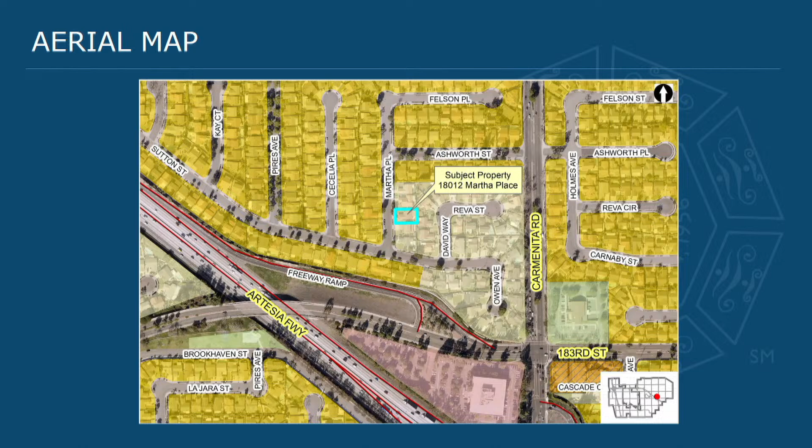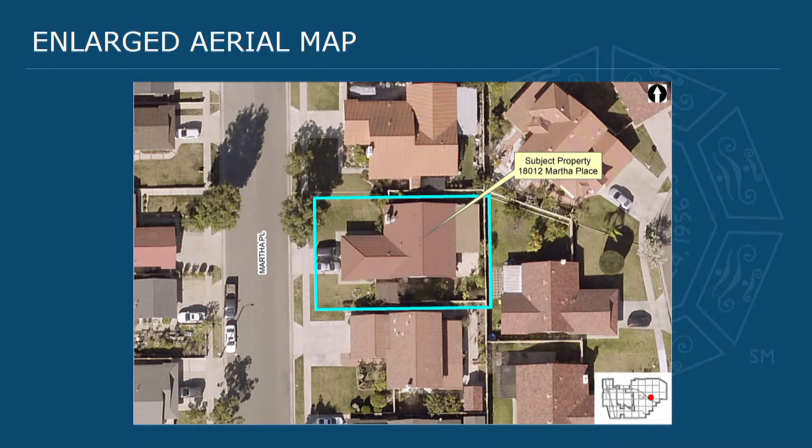The property owner at 18012 Martha Place is proposing a 433 square foot first floor addition and to add a new 1,293 square foot second floor addition to an existing single family home. For details of this project, I'd like to direct your attention to the screen. This is an aerial photo of the subject property, which is located north of 183rd Street and west of Carmenita Road. Sorry about that. Can you hear me now? This is an enlarged aerial view that shows the details of the property. The property is bordered on the north, south, and east by single-family homes, and on the west by Martha Place, across from which are also single-family homes.

This is a view of the front of the existing one-story house looking east from Martha Place. This is a view looking north at an existing unpermitted patio in the rear yard. In order to comply with the Cerritos Municipal Code, project-specific condition of approval 42 has been added to require the unpermitted patio to be removed as part of the proposed project. This is a view of the side yard looking west at an unpermitted storage shed and overgrown vegetation along the southern property line. Project-specific condition of approval 43 has been added to require the removal of the unpermitted shed along the southern property line, and project-specific condition of approval 44 has been added to require all overgrown vegetation and plant material along all property lines be trimmed back and wholly contained on the subject property.

This is the adjacent neighbor plan, which shows the location of second-story windows of the subject property and their relationship to existing windows on adjacent properties. As shown on the plans, the homes to the north and east of the subject property are single-story residences. The home to the south of the subject property is a two-story residence. However, no second-story windows of the addition align with the second-floor windows of the home to the south. Therefore, there are no privacy concerns related to the issues arising from window placement on the subject property.

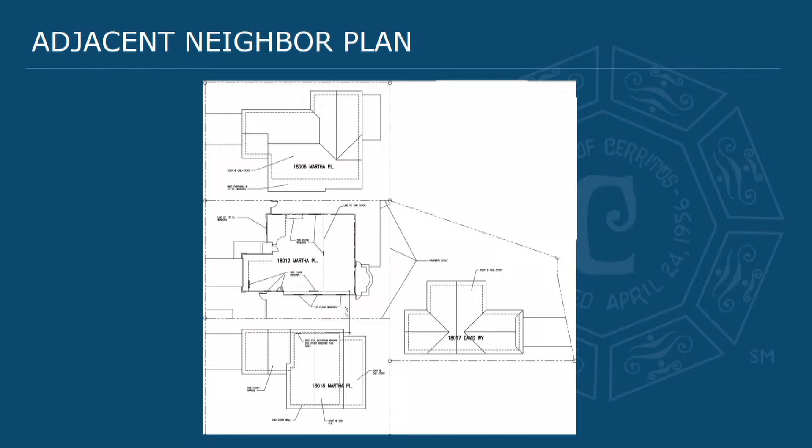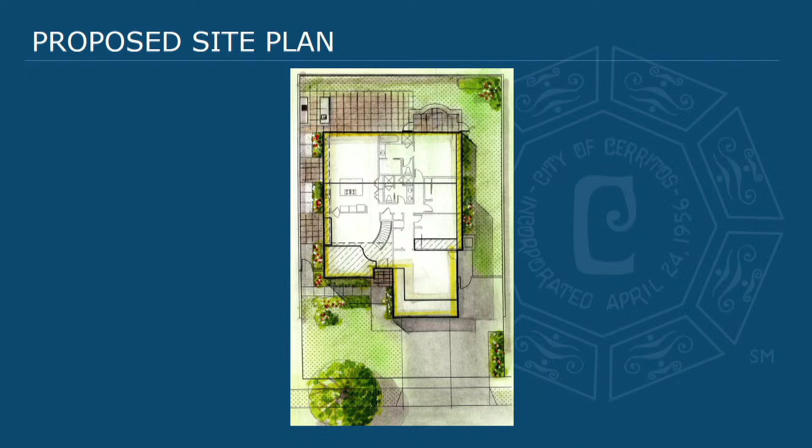This is the proposed site plan. As mentioned, the applicants are proposing a 433 square foot first floor addition and to add a new 1,293 square foot second floor to the existing single-family residence. As proposed, the project meets all setbacks and lot coverage requirements.

This is the proposed first floor plan. Upon completion, the first floor will include a living room, a dining room, a kitchen, a master bedroom with master bathroom, 2 additional bedrooms, a family room, a bathroom, a half bathroom, and a laundry room. This is the proposed second floor plan. The second floor will include a junior suite bedroom with a bathroom and a walk-in closet, 2 additional bedrooms, 1 more bathroom, a laundry room, and a loft.

This is the front elevation. The residence will be finished with a white colored stucco and dark brown trim. 6-inch wide brown colored Hardie board siding will be featured on portions of the front and side elevations. In addition, the front elevation will include decorative stone veneer, which will wrap around the side elevations along the areas that are publicly visible. The front elevation also features a balcony that overlooks the subject property's front yard and Martha Place.

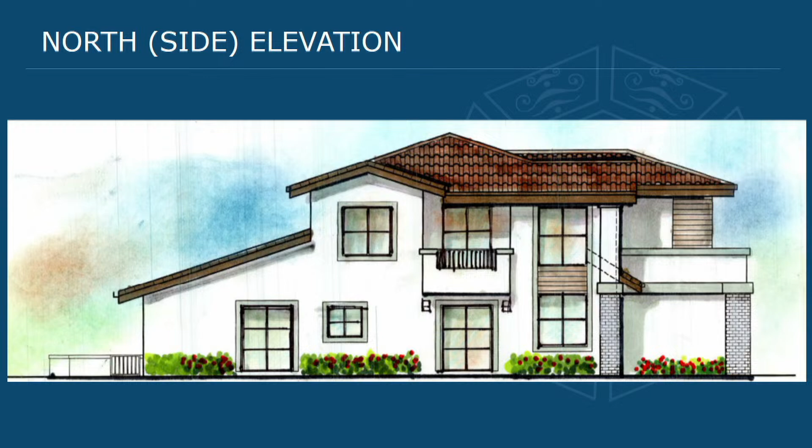This is the rear elevation. The roof of the residence will be covered with a chestnut-colored stone-coated metal, which is consistent with the existing roof material. This is the north side elevation. Here you can see the proposed balcony located on the north elevation. The proposed balcony is solid on the sides and the majority of the front. The balcony also faces the roof of the adjacent single-story home to the north. Due to its location and design, potential privacy issues are minimized relative to the adjacent residence.

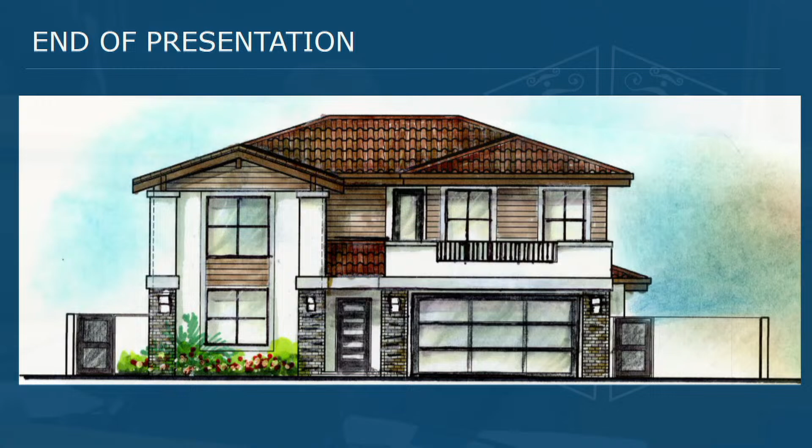This is the south elevation, which features the same architectural elements as indicated on previous slides. All colors and materials will be subject to the approval of the Department of Community Development to ensure that these elements complement the entire house and surrounding neighborhood. This concludes the PowerPoint presentation. Staff recommends that the Planning Commission approve Precise Plan 2023-17, subject to all the conditions of approval contained in the report. This project is categorically exempt from CEQA review.

To date, staff has received one written correspondence from a neighbor in response to the public hearing notice and prior to the publication of the agenda materials. In this correspondence, the neighbor expressed concerns about the previously mentioned unpermitted shed on the southerly property line, overgrown vegetation, and construction noise and dust as a result of the proposed project. These issues and concerns have been proactively addressed in the staff report by way of standard conditions of approval and additional project-specific conditions of approval to reduce potential impacts of the project on the adjacent surrounding properties. The architect and homeowner are in the audience, and we are happy to answer any questions that you may have at this time. Thank you.

Thank you. Are there any questions or comments from my fellow commissioners? Thank you, Chair. Yes, I just had one question on Exhibit 12. By the windows on the left side, there's something there, and I just wanted to know what that was in the photo. I don't know if it was a planter or...

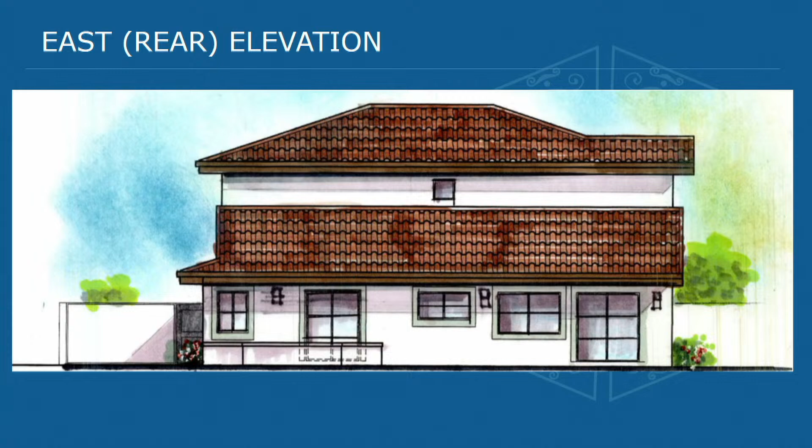Or is that, I just can't tell if the far right... Yes, so Commissioner, that's the north side elevation, Exhibit 13, which is the balcony that faces north. And then on the far right, that is the front portion of the balcony that's in the front. Okay, so you will be able to stand on the balcony from the side and the front? In actuality, there's a balcony in the front, but you won't be able to see anything from the way that the balcony is designed. It's a solid wall that goes all the way up.

Okay. So you can't walk around to that side? No, you cannot. You'll be standing in the front, facing the front. If you tried to face that direction, you're just gonna have a wall there. If you take a look at the floor plan, you will be able to see how that balcony on the second floor plan works.

Okay. And then another question is, when we were looking at the photos, and it's hard to, when you drive by, to look at the overgrowth. Is all of that overgrowth from this house, or is it from both houses that we see in the pictures? The overgrowth is from the front portion on the right side of the property. It looks like there's a bougainvillea plant that I believe started on this side of the property and has grown way over.

To the other side? Yes. So we're talking Exhibit 5, Picture 2. That bougainvillea, the red on the right, we think it's in the property we're looking at, and it's just grown on to the other side as well. Yes. Okay. So I couldn't see a shed in view one. And so I'm not sure, is there a shed? Are we saying there's a shed behind this overgrown area? That's going to come out?

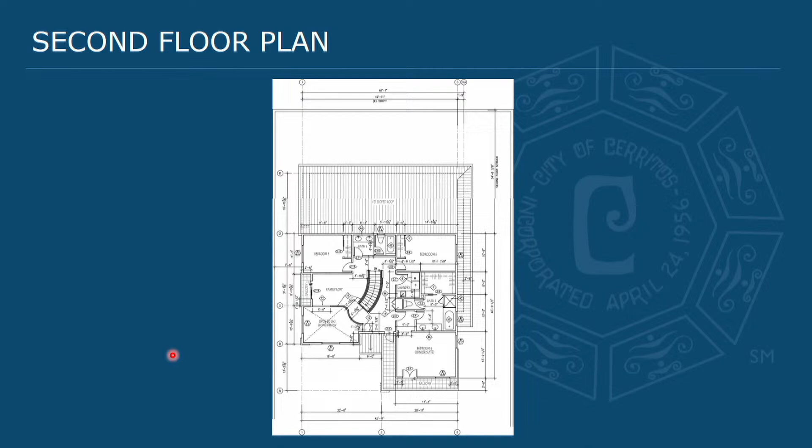That is correct. Okay, and it's not that the balcony is such that you can't see through it, because it seems to have some kind of a railing in there. No, the railing is, I believe, at a... Hold on, one moment, please. So the balcony is low in the front and it's solid. And if you look at it in this elevation rendering, this is the only portion where you can see through. This is approximately 48 inches, as required by the building code. You can only see through this portion. You cannot see through it on this side.

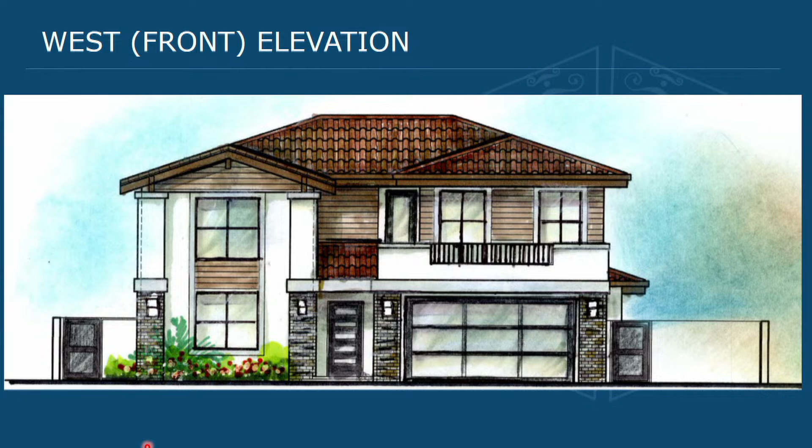And because this balcony is on the side of the house, you cannot see through the side of the house this way. And the other balcony is the same dimension. It's designed in the same exact manner. And that balcony overlooks just the first floor roof of the home. Thank you for that clarification. Thank you. Yes, Commissioner. I have another question, sorry.

So in reading the email from the neighbors, they talk about the shed's built against the wooden fence, and they're using the fence to support it, and they're saying it's unsafe, but the conditions talk about a block wall that will be put in around the property line, because it doesn't say anything about a wood fence being put back up. It talks about a block wall. So is that what's replacing the wood fence? No, it is currently existing a block wall. It is a solid block wall along the southern property line.

So, the gate is made out of wood, but there is a block wall along the southern property line. Okay, so I apologize. My confusion is their email says that there's a shed built on a wooden fence, and the fence is supporting the shed. It's a wooden fence extension, but that is a block wall along the southern property line. Okay, so bear with me.

In my mind, there's 3 walls in a backyard. You got 2 sides and the back. Are all 3 walls a block wall? Yes. Okay, and there's a wooden fence extension along the southern property line that was put up. Okay. Thank you for that. And then the other question is,

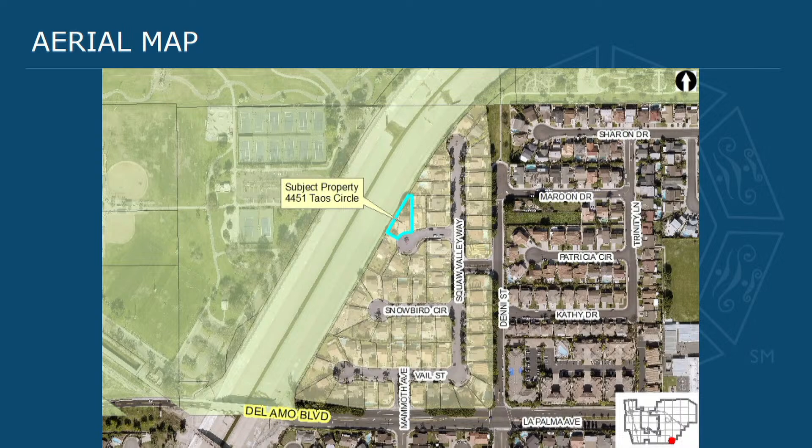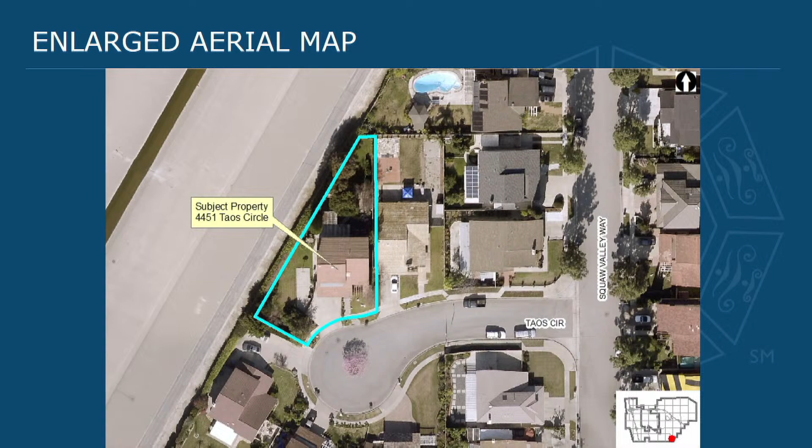So this is the location of the property, which is at 4451 Taos Circle, and it's generally located north of Del Amo Boulevard, west of Denni Street, near the city of La Palma border. The property is bordered on the north and west by the Los Angeles County Flood Control District, Coyote Creek River Channel. The subject property is bordered on the east by single-family residential property zoned RS 6500. The property is bordered on the south by the cul-de-sac of Taos Circle, which is a 56-foot-wide residential street. And across the street are various residential properties also zoned RS 6500.

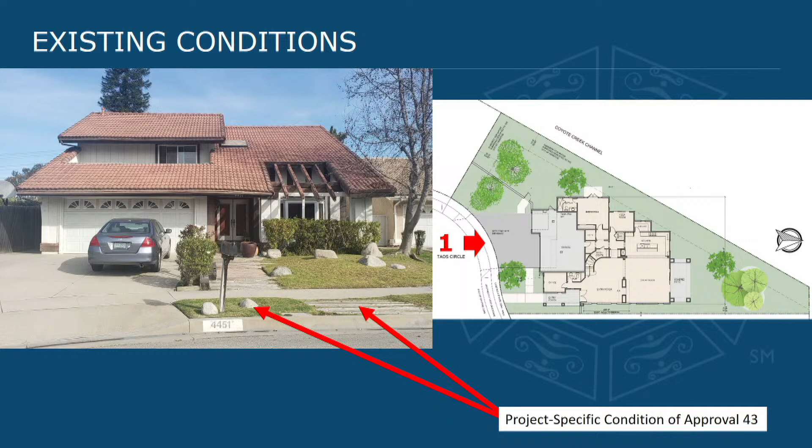This is a view of the front of the existing two-story residence looking north from Taos Circle. At this time, timber blocks that simulate wood planks and various boulders have been placed in the city parkway in front of the front yard, which is in violation of the Cerritos Municipal Code requirements. Project-specific condition of approval 43 has been added to require that the timber block and boulders be removed and the parkway be restored with live organic ground cover to comply with the Cerritos Municipal Code requirements.

This is a view of the front yard of the existing two-story residence looking west. Along the south front property line, there is an existing 6-foot-high redwood fence, shown on this slide, which is a violation of the Cerritos Municipal Code fencing requirements. This type of wall is considered a return wall in the municipal code, which is required to be constructed of decorative block in the single-family residential areas. Therefore, project-specific condition of approval 42 has been added to require that the property owner remove the existing non-conforming wood fence and replace it with a decorative block wall to bring the property into conformance with the Cerritos Municipal Code requirements.

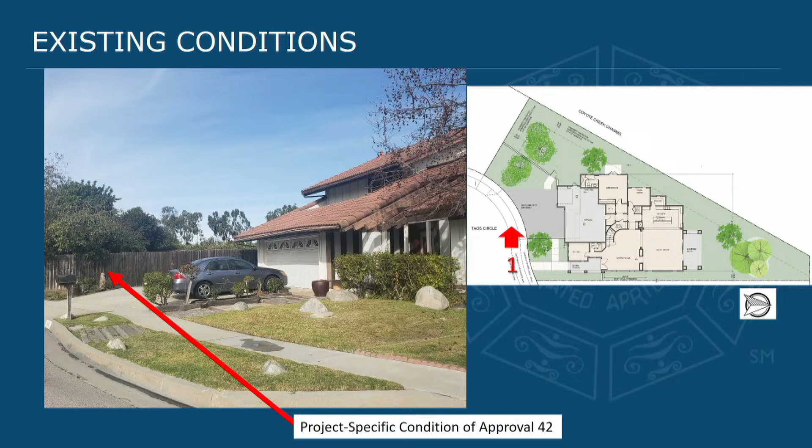The property abuts the Coyote Creek Channel to the west, and beyond the channel to the west is Don Knabe Regional Park. The subject property abuts the cul-de-sac of Taos Circle to the south, and no view impacts are expected due to the existing front yard setback from the property line and the width of the street from the existing single-family residential properties.

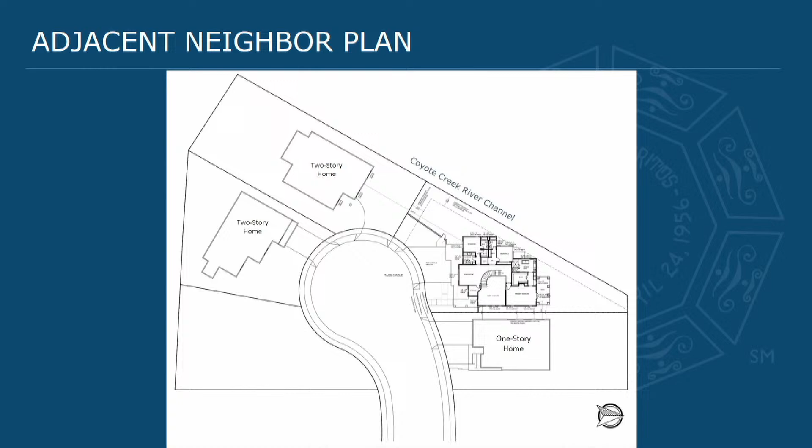This is the proposed site plan. The proposed additions meet all setbacks and related development standards of the single-family residential zone. This is the proposed first floor plan. The applicant is proposing to demolish most of the existing single-family two-story residence and garage and leave a portion of the first floor wall along the east elevation and also retain most of the existing foundations.

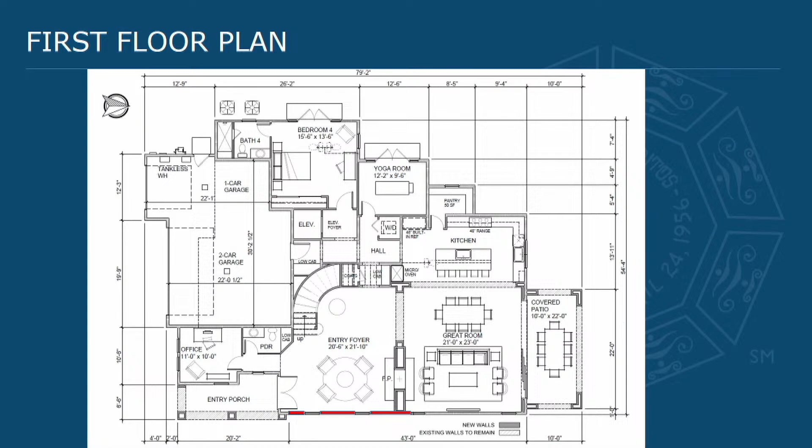I have shaded the existing walls that will remain in red to better have you understand what walls will remain after demolition. An additional 148 square feet of garage is proposed so that the home will go from a 2-car garage to a 3-car garage. The proposed first floor addition is 1,300 square feet, and upon completion, the total floor area, with the existing first floor area, will be 2,332 square feet. It will include an entry foyer, a great room, a kitchen, bedroom, office, yoga room, an elevator, and 2 bathrooms.

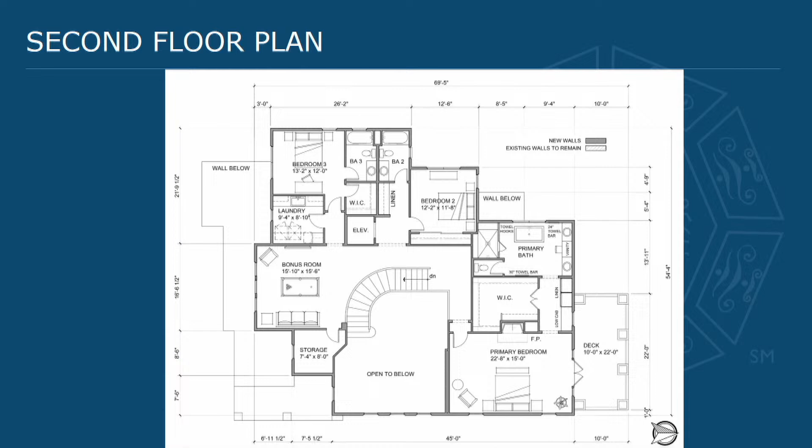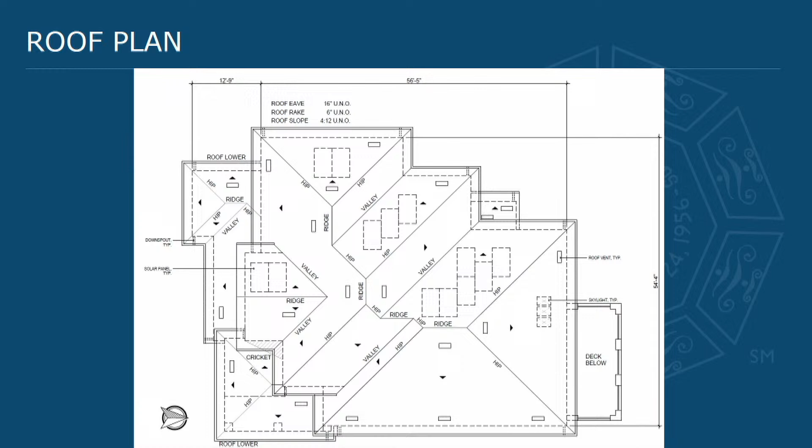This is the proposed second floor plan. The applicants have requested approval of a 1,529 square foot second floor addition. The existing second floor and second floor addition will total 2,070 square feet in area and will include a primary bedroom with bathroom, 2 bedrooms, 2 bathrooms, laundry room, elevator, and a bonus room. This is the proposed roof plan. The roof of the residence will be covered with a Copper Mountain colored blend lightweight concrete tile.

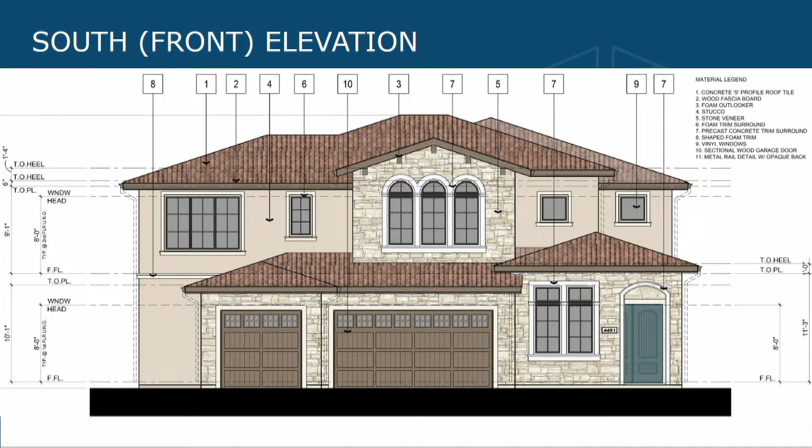The architectural style of the residence is Mediterranean. The residence will be finished with natural linen, beige colored stucco, and pure ivory, white colored trim. The south front elevation will feature Eldorado stone veneer in a brown tone color along the base of the home, the garage, the front porch, and columns, and on a portion of the second floor. The stone veneer wraps around the sides of the home and terminates at the west side gate. The rear of the house will feature a stone-covered patio with a deck above, and the walls of the deck are enclosed with stone-covered rail posts that include opaque glass inserts.

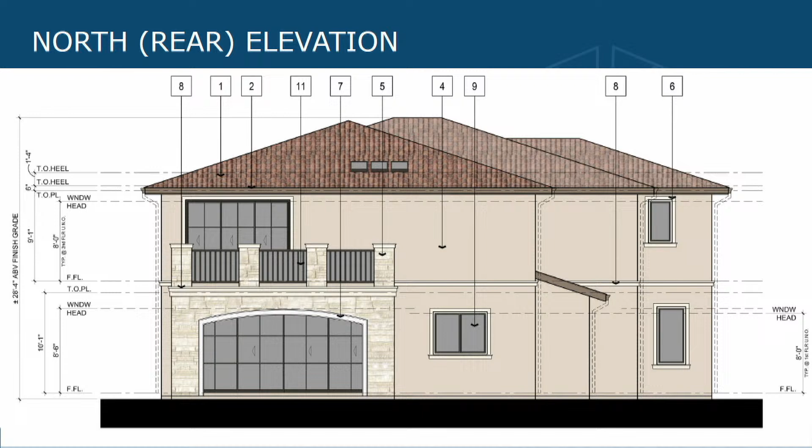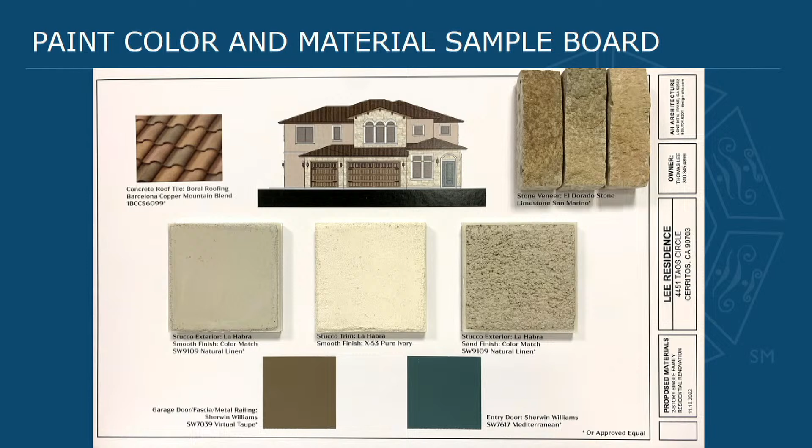Before you this evening is consideration of Precise Plan 2023-18, a proposal to construct the previously discussed first floor addition, garage addition, and second floor addition to an existing single-family residence. At this time, it is recommended that the Planning Commission review and discuss the information provided, conduct a public hearing, and adopt a resolution approving Precise Plan 2023-18.

This ends the PowerPoint presentation. Staff has determined that the project is categorically exempt from CEQA. No public comments were received by staff regarding the proposed project. I'll be happy to answer any questions that you have at this time. The project architect is in the audience tonight and can answer any questions if needed. Thank you.

Are there any questions or suggestions from the commissioners? Yes, I have a question. I know other cities, once Planning Commission approvals are made, there's some cities that once that expires, if they don't go through with the project, like Hawaiian Gardens is a year, they charge a fee, or they can charge a fee for an extension. Do we do any of that?

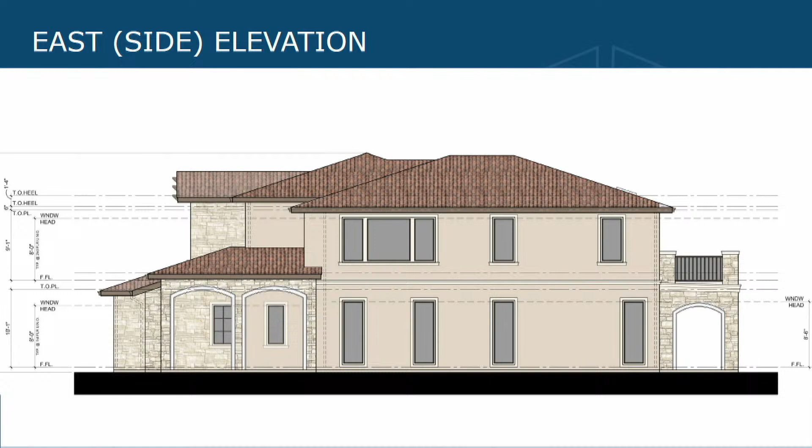And then I would suggest that when we open the public comment section, we call the architect or the applicant to the podium to provide clarification on the windows and the intent regarding the size of the first floor. Sounds good. Thank you.

Any other questions from the commissioners? Having none, I'll close the commissioner section. We will now open the public comments section for this. If anybody in the audience has any questions, please come forward, state your name and your address, and you have 5 minutes.

Do I gotta? Hello? Okay. Yes. Thank you, Chair and Planning Commission members, for your time today and review and consideration of this project. My name is Amy Ho, and I am the architect for 4451 Taos Circle. So should I go in and answer the questions first? Yeah, go ahead. Okay.

My question was, the windows with the current rendering look very long, but instead of placing them in the middle, you placed them at the bottom. I'm wondering why. Yes, so if you look at the east elevation, where those four tall, slender windows are, the first two on the left, in coordination with the windows on the second floor, in that specific area is the double height ceiling for the entry foyer. So in between the 3 sets of windows on the second floor and the 2 slender windows on the first floor, that is all open 2-story space.

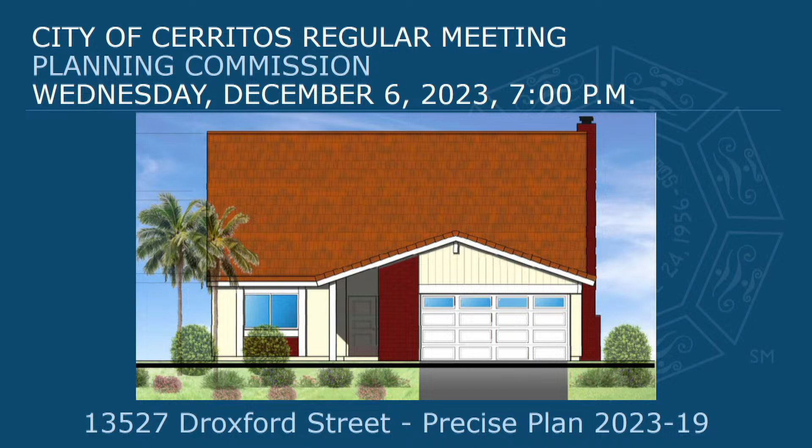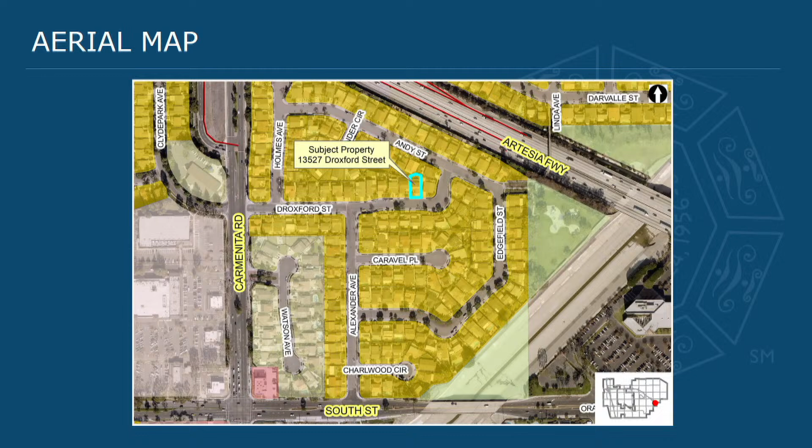Property owners of 13527 Droxford Street are proposing to construct a 500 square foot first floor addition and a 623 square foot second floor addition to an existing one-story residence. For details of the project, I'd like to direct your attention to the screen for a presentation. This is an aerial view of the subject property, which is located east of Carmenita Road and south of the 91 freeway. This is a large aerial view that shows the details of the property. The property is bordered on the north, east, and west by single-family homes, and on the south by Droxford Street, across from which are also single-family homes.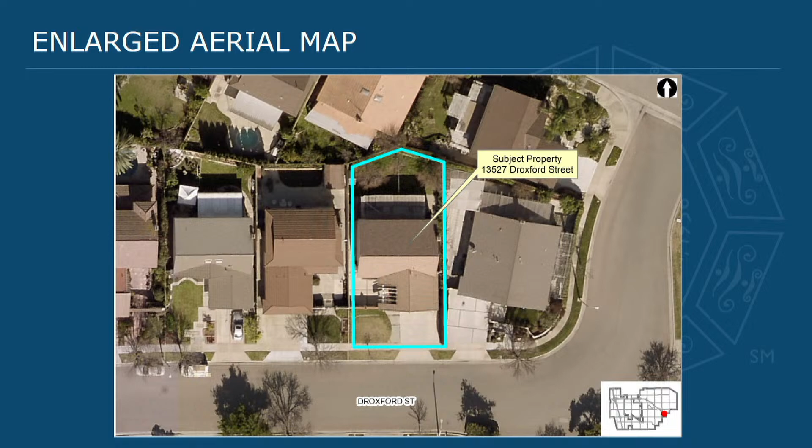In the front yard area, the driveway has been extended to the east without city approval, resulting in an existing side yard landscape planter that is less than 3 feet wide. Additionally, the pedestrian walkway to the west of the driveway is not currently separated from the driveway by an 18-inch planter. And lastly, there is an unpermitted 5-foot tall solid block wall within the front yard area. As a result, project-specific condition of approval 42 has been added to require the removal of a portion of the existing driveway along the east side of the property line to establish a minimum 3-foot wide landscape planter in that area.

Project-specific condition 43 has been added to require the removal of a portion of the walkway to establish a minimum 18-inch landscape planter in this area. And project-specific condition 44 has been added to require the applicant to obtain city approval and the appropriate permits to reduce the height of the existing block wall in the front yard area to a maximum solid height of 30 inches with 2 feet 6 inches of wrought iron or other open fencing material as required by the Cerritos Municipal Code.

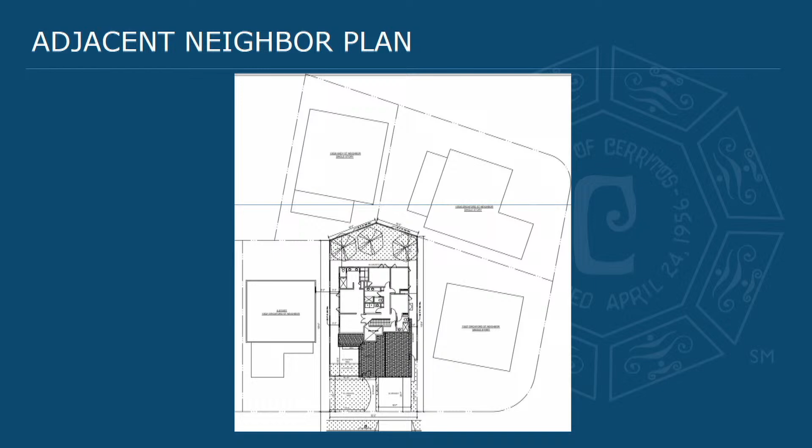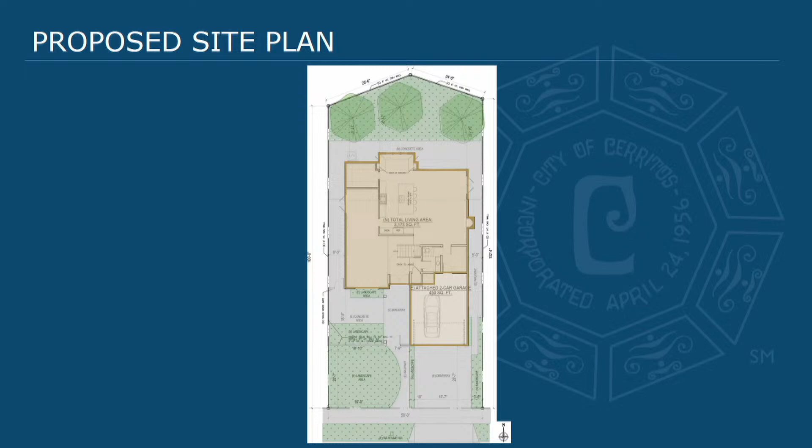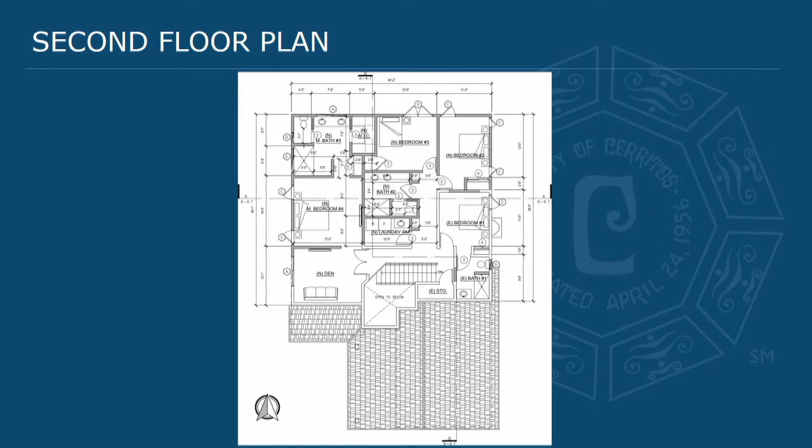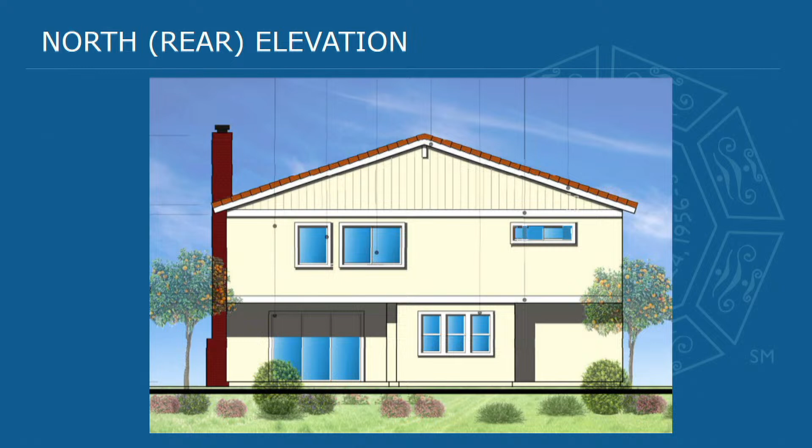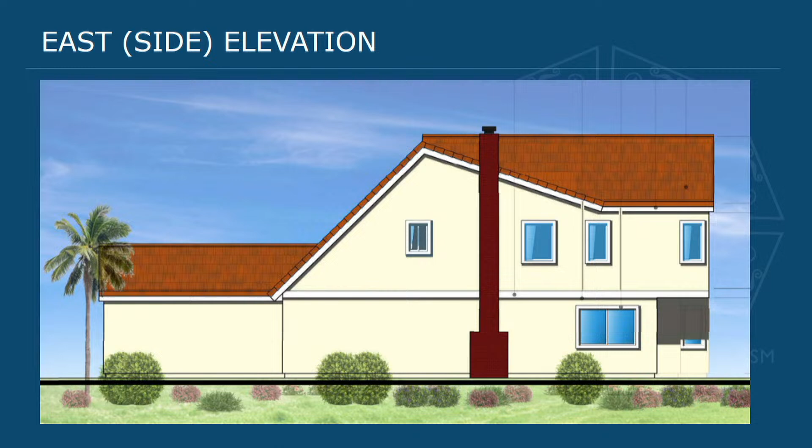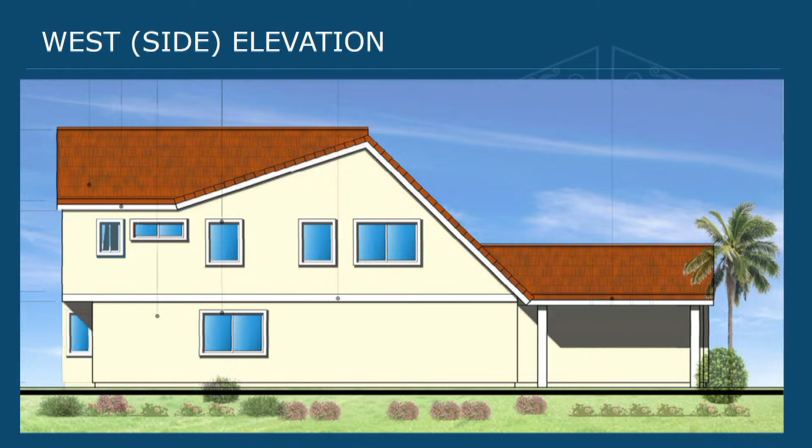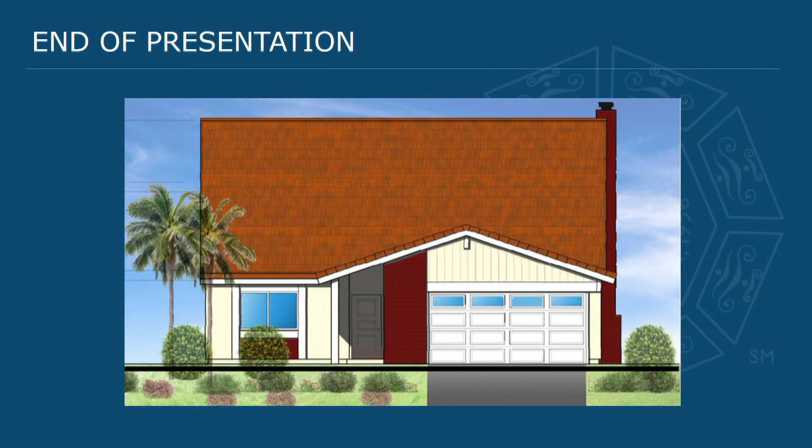This concludes the PowerPoint presentation. Staff recommends that the Planning Commission approve Precise Plan 2023-19, subject to all the conditions of approval contained in the report. The project is categorically exempt from CEQA review, and to date, staff has not received any comments as a result of the public hearing notice. The architect and homeowners are in the audience, and we are happy to answer any questions that you may have at this time. Thank you.

Thank you. Do any of my fellow commissioners have any suggestions, any questions for the staff? Yes, Commissioner Gandhi. Thank you, Chair. On Exhibit 12, that's the north rear elevation. Is that gray shading a shadow thing? Yes, that is. And the shadow is coming from where? However the architect interprets where the sunlight is coming from. Okay, I'm just confused as to why the shadow's there. Also on page 5 of the packet, I think there is an error. It says total floor area with 2-car garage and total floor area without 3-car garage. That is a mistake that we will correct. Okay, just wanted to point that out. That's it. I have nothing more.

Thank you, Commissioner Gandhi. Any other? Thank you, Chair. I just had one question on Exhibit 7. Behind the block wall, it says there's new landscape. Is that part of one of the conditions in the total landscape that's required? Yeah, presently it does not meet the front yard landscape requirements and total landscaping of 40%. And by adding that portion of landscaping behind the new block wall, they will increase their landscaping to meet the municipal code requirements. Okay, thank you.